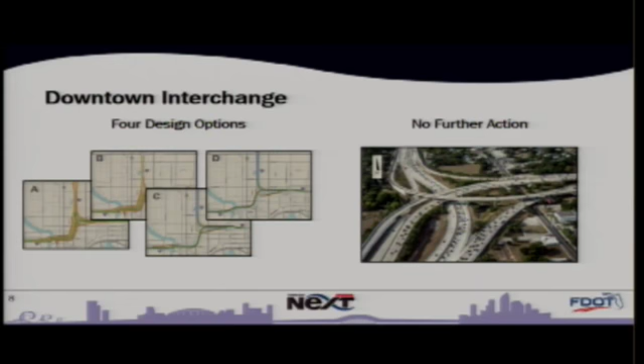We currently have no funding for right-of-way or construction, nor is that really something we're pursuing at this time. The project I wanted to talk to you about a little bit more was the I-275 corridor north of Interstate 4.

As you may remember, one of the first things we did with the Tampa Bay Next program reset was agree to eliminate express lanes north of I-4 along I-275, and said we will work to not have any impacts to right-of-way along the main line. That was in response to public input, and to the concerns expressed to us at a lot of our public meetings.

However, we felt like we did need to do certain things north of there because it is the largest crash corridor in the district. We have over 1,500 crashes a year in the area, and we also have a lot of operational issues. I know there's a concern about what this project could be, so today hopefully I can allay some of those concerns.

First, I'll talk to the transition project. The transition project goes from Interstate 4 up to MLK, because that's considered part of the SEIS we're still working on, but that is a transition project. This will complete operational improvements to provide a transition to existing conditions to the project shown in the Section 7 PD&E limits, which I'll discuss in a second.

Improvements include providing auxiliary lanes northbound at Florabraska Avenue to Dr. Martin Luther King Jr. Boulevard, and southbound at Dr. Martin Luther King Jr. Boulevard to the flyover ramp at Interstate 4. This section does not require right-of-way and will provide sound walls where feasible.

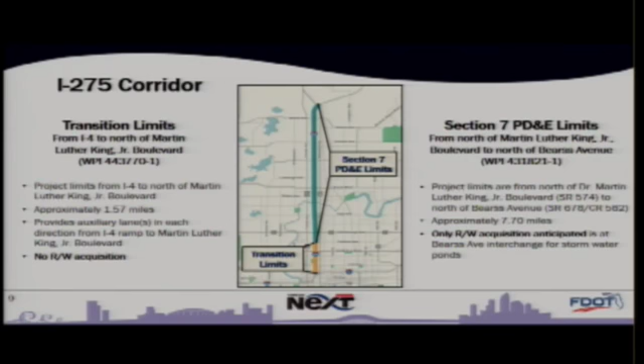Along the mainline I-275, the existing horizontal and vertical alignment will be maintained to avoid right-of-way impacts. All of the proposed improvements for mainline I-275 will take place within the existing right-of-way. At the Bearss Avenue interchange, minimal right-of-way may be needed for stormwater ponds.

This is just a graphic that shows the improvements that will be part of the transition, and you can see in yellow where we add pavement. We know this won't solve the overall problem, but it allows us to move some of the merge and weave areas around, so that traffic in the turbulent areas where we see a lot of side swipe, lane diving, and those sort of things can be isolated from the main flow of traffic.

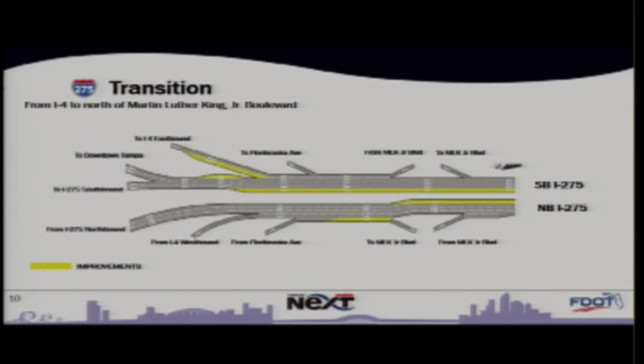This is the preferred typical section for that area. As you can see, it's all within the existing right-of-way. We are adding sound walls along the whole way, and we'll also be adding 1 general purpose lane in each direction and the shoulders. One of the other benefits to adding the shoulders is that, as this is a primary evacuation route, those shoulders could be used during an evacuation as an additional lane.

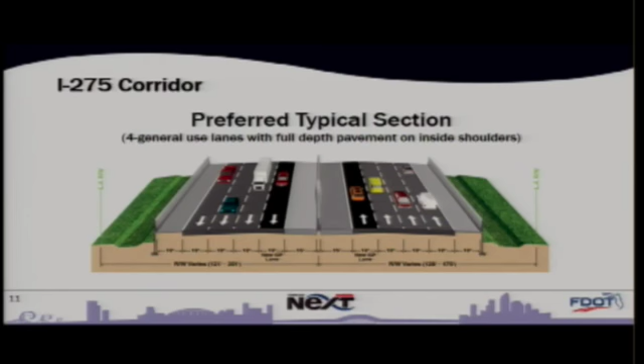Some of the other things we're doing as part of this project, in addition to just the traffic improvements, is pedestrian-friendly underpass improvements. This would allow us to do some much-needed improvements underneath the interstate to improve pedestrian safety and connectivity, as well as enhance aesthetics. This is something we've heard a lot from the community as we've gone to public meetings.

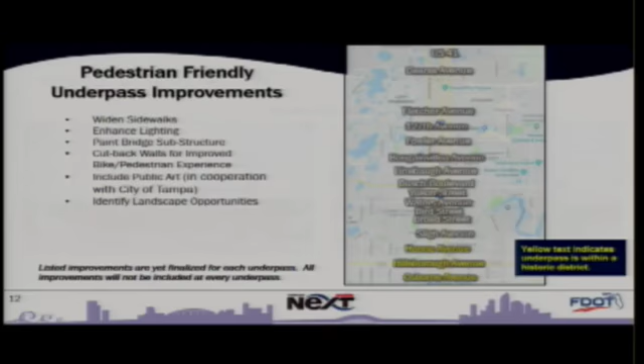Not all the interchange underpasses will receive the same improvements. Some are easier to do than others. But some of the things we're looking at is widening sidewalks, enhancing lighting, painting bridge substructures, cutting back the walls for improved pedestrian and bicycle experience. We could potentially include public art if we partnered with the city in some of those areas, as well as landscaping options. Here you can see just a graphic of what it could look like.

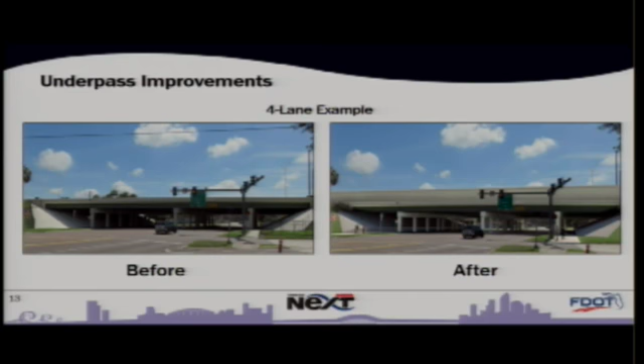And I think this was not the one we had. Is there another one in here? Yeah, this is a better one here, just to show you.

You can see up there beforehand, you kind of have the slope wall. You got the sidewalk tucked in there behind the columns. What we're able to do is bring that all back and create more area we can use for things such as providing additional room, maybe 10-foot sidewalks and a path, things like that, as well as providing lighting to make it much more safe.

In one of the recent Tampa Bay Next listening tours in West Tampa, we heard that the underpasses of 275 were a safety concern. So we're out there now putting in a lot of enhanced LED lighting underneath the overpasses. If you go through there at night, I think Dale Mabry's already installed. Some of the other ones should be installed very soon. I think they'll all be done within a relatively short period.

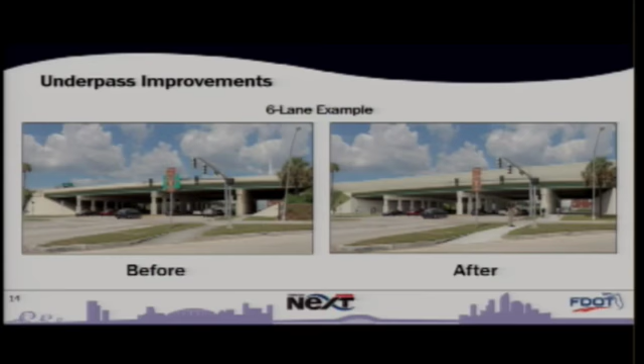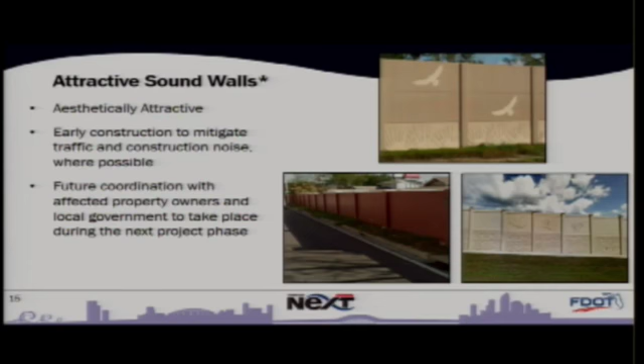And of course, noise walls was one of the other things we heard from the community. They'd like for us to put noise walls up. So as part of this project, we would be putting noise walls up along the entire corridor. In some cases, extending the existing walls, and some placing, adding in all new walls, as well as looking for landscape opportunities. There's been a trend recently to move away from palm trees and more towards some of the hardwood trees. So we'll be working with the community to see what kind of landscaping we want. We won't have to necessarily just come in there and put in what we've always put in. We're very open to looking at alternatives, working with the community.

One question I did hear asked earlier was about what is the benefit of putting in this additional lane. Isn't there still going to be a lot of traffic there? Yeah, there's still going to be a lot of traffic there.

But what we will find is that if you take, for instance, the northbound coming out of the I-4 interchange, right now that backs up significantly in the afternoon peak period, and it goes up all the way till you get probably past Hillsborough and further. This additional lane will flush that traffic out much quicker. So in the northbound direction, I think you'll see a much greater immediate benefit.

In the southbound direction, in the future, one of the things I hope to be able to do in the not too distant future is to provide a second lane for the ramp from southbound I-275 to I-4, but that's going to take us getting through the SEIS and then figuring out how we can do that and what the impacts would be to right of way.

But what we can do is create an area where instead of having those lanes that you have, the one lane going and the other lane basically blocked by everybody trying to cut into traffic, we can isolate that over and bring those two lanes all the way up to the bridge. We may still have some backups, but we may be able to get rid of a significant number of those over 1,500 crashes a year that we're seeing in that area.

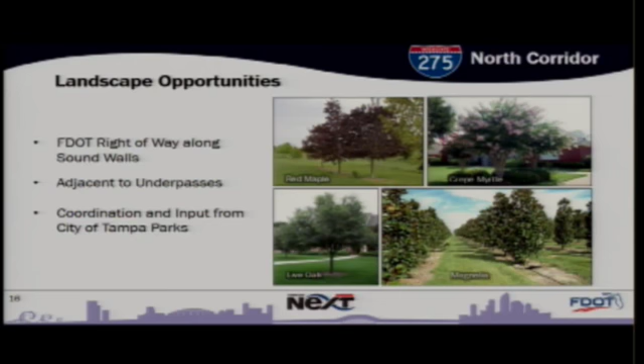On induced demand, I get that. I understand there's a lot of theory behind it. I will say that the real solution to induced demand is growth management and land use. Highways don't necessarily induce demand without the land use. As long as we continue to get more demand, we're going to try to respond as best we can to that demand. But we also understand that working together, hopefully on land use and transportation, we can come up with better solutions.

The I-275 North Corridor public hearing will be on March 26th at the Seminole Heights United Methodist Church, and we'll be there to take public comment on that. With that, that's my Tampa Bay Next update, and I'll be glad to answer any questions.

Just a quick question that somebody asked about regarding the underpass improvements - anything for the Martin Luther King 275 one coming up? Let me check the picture. So that's the picture, I guess, that they had here of what it would look like, here at Osborne too, this one here.

Do you know what we are? I'm going to ask my staff here because they know each location a little better than I do. This is just a concept. It's a little difficult to see what is different, but I can point it out to you. The sloped walls are cut back to widen the sidewalk. Can you see where they're cut back on the second slide? They're not cut back all the way to the end like at Hillsborough, but they're partially cut back.

There are sound walls along the bridge as well, so you can see the barrier wall up there is higher than the picture on the left, and then the sidewalk areas are widened along the roadside. So it looks like it's about maybe a 10-foot instead of a 5-foot sidewalk.

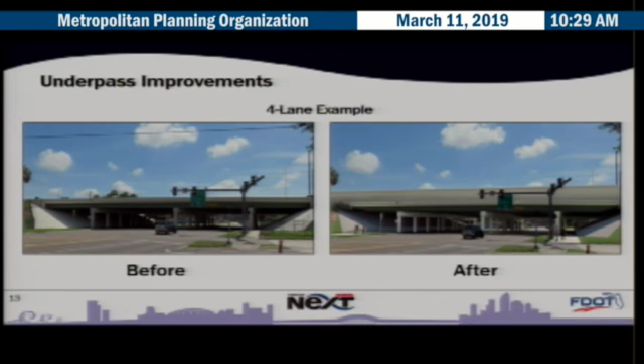Do you have any anticipation date for when these changes would happen? This project is partially funded now, in 2023, so calendar year could start in '22. Not all the funding is there yet, but we'd probably start at the south end and move our way north if we got money.

And what about sound walls going north on 275? That would all be part of this project, wherever it extended to. And it would go from where to where? From Osborne - it would start at I-4. There's already some sound walls going in. It's going to go all the way from I-4 up to Bearss, pretty much. Okay, sounds good.

Thank you, Commissioner Overman, you're recognized. Thank you, I really appreciate the work that you were trying to do here. It's a very challenging area because it's very tight - there's some bottlenecks in the highway system.